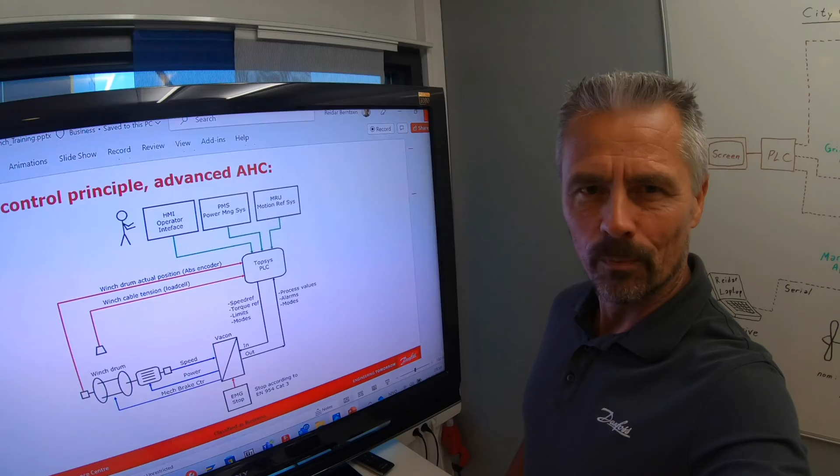You should have seen episode 4 with the basic setup and open loop settings. This episode 5, we are going to look into the closed loop IF control, sensorless, and overspeeding.

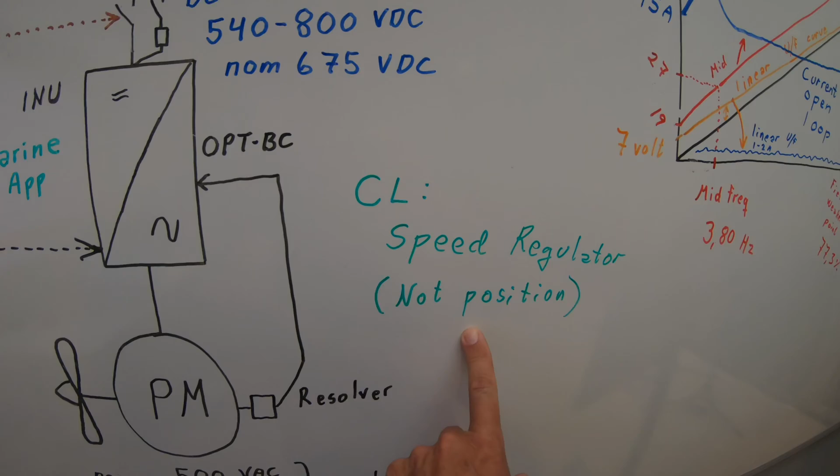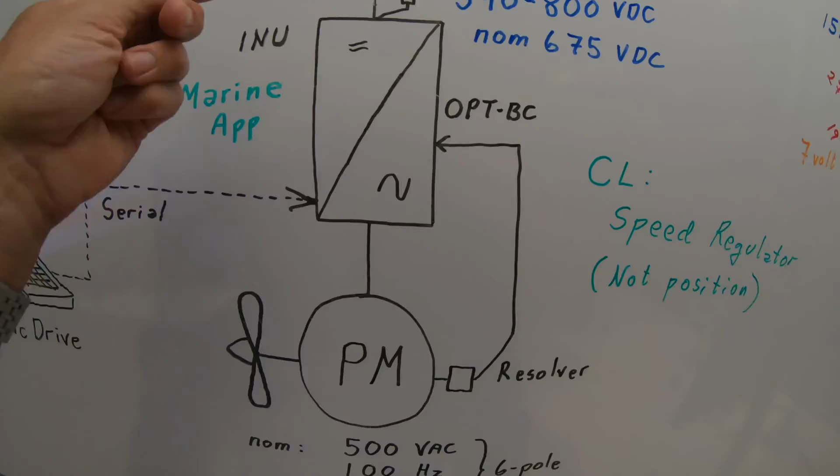The closed loop on a marine application is basically a speed regulator, not a positioning regulator. We have feedback from a resolver or incremental encoder to the option board in the drive, and it will try to do the most precise speed that is ordered. For positioning systems, like advanced winches, active heave compensation and so on, usually the closed loop in the drive is this one, and then you have a PLC control system that calculates positioning and motion control.

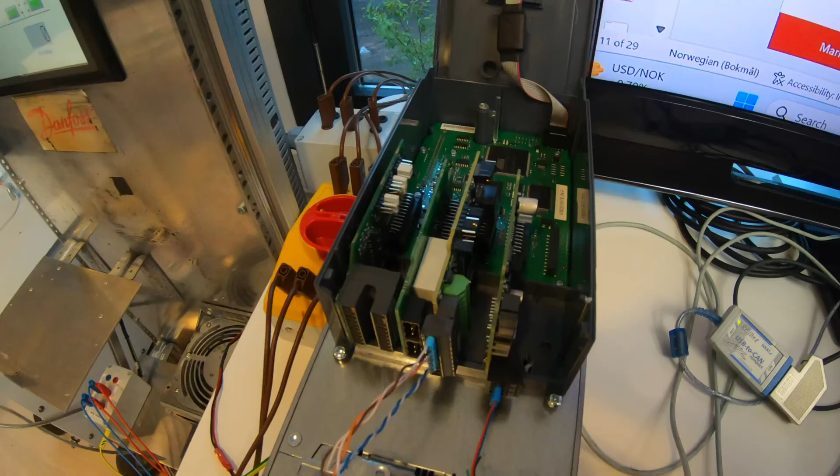The encoder board in the drive must be put in slot C. In this case, we have a resolver in the Editron motor and the board is opt BC. Here we see that the jumpers need to be set to a specific setting. If we look at the jumpers.

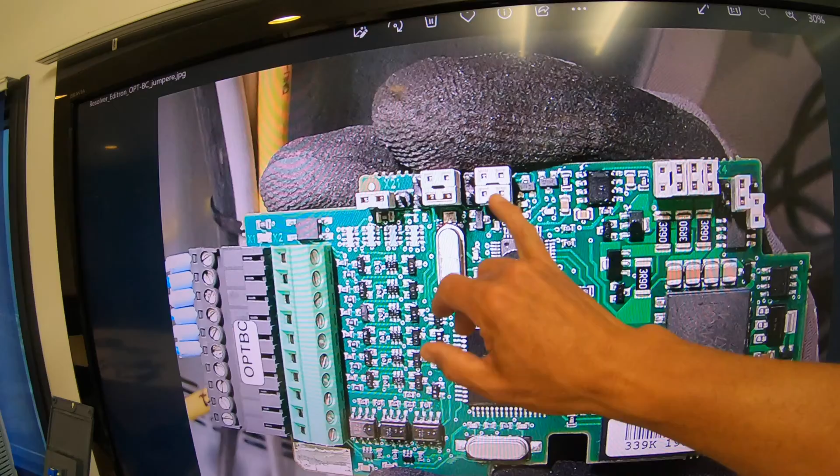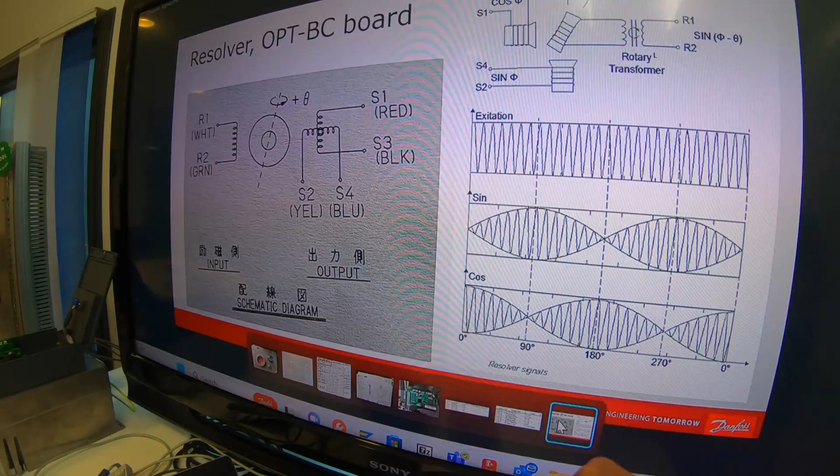This is the amplification of the sinus cosinus. This is the excitation voltage, 7 volt, because the signal on the resolver looks like this. You have an excitation of 10 kilohertz, 7 volt amplitude, a sinus and a cosinus signal. It's actually a positioning signal, not really a speed signal, because the drive calculates the speed out of the positioning.

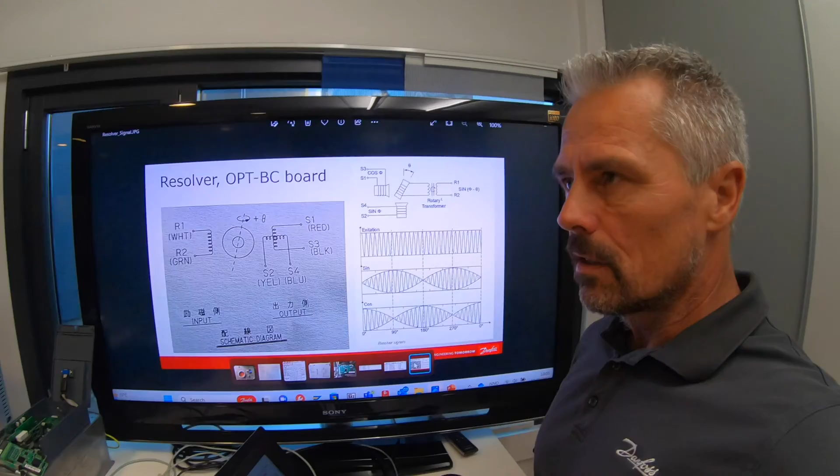The reason why it's positioning is that the drive needs to know the polar angle where the magnets are. So traditionally the resolvers are for positioning and identification of the polar angle.

With the Editron motors, the resolver will have the same pole number as the motor itself. So this is a 6-pole motor, and the resolver is actually the same, so it's mounted synchronous to the magnets. You can actually use the same shaft angle parameters for all of them, so identification of the encoder, you can copy it from another drive.

The cable itself needs to be really well shielded. Grounding of the motor needs to be quite well. This is really cheap-ish cable, for the laboratory only - you only get away with it because it's short lengths. It's really super important that you have a good grounding system of motor, drive, and control system.

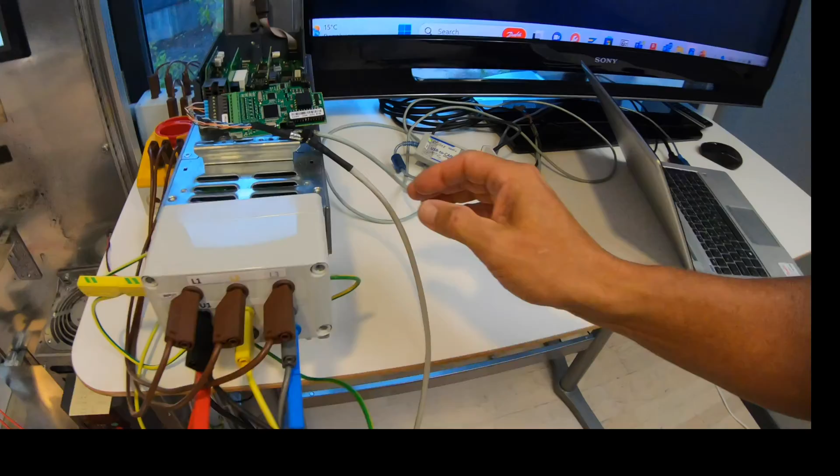You will get a lot of noise and problems with signal quality if the grounding is not correct. Usually we ground the signal cable here in the drive end and not in this end. This end is grounded by the big grounding connection back to the drive.

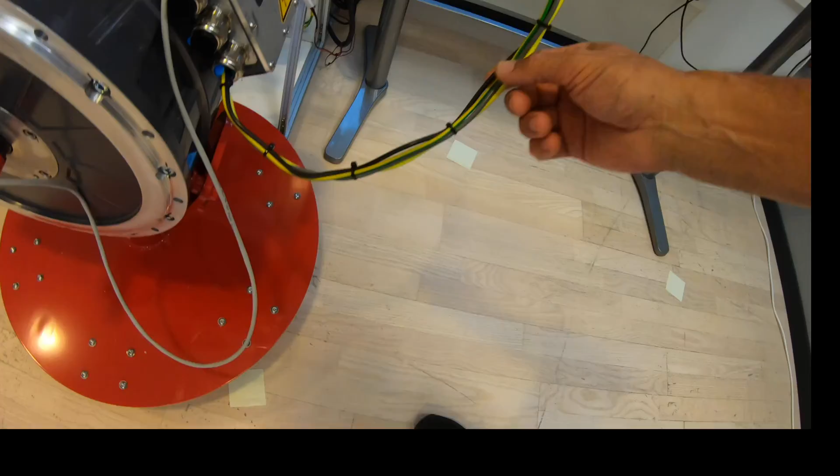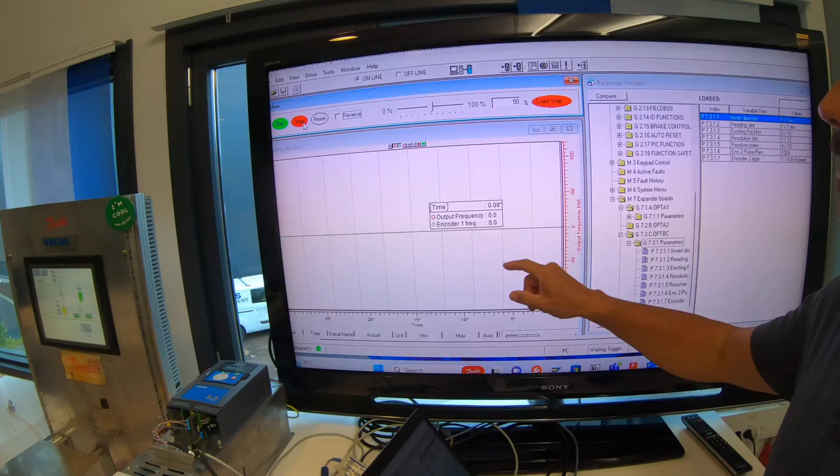Functionality test, scaling, and also a look at the noise from the resolver signal. On NcDrive, I show my output frequency from the drive. I look at the encoder 1 frequency, which is the raw signal coming from the resolver. On the parameters, I show expander boards, opt BC board, and the parameters related to the resolver.

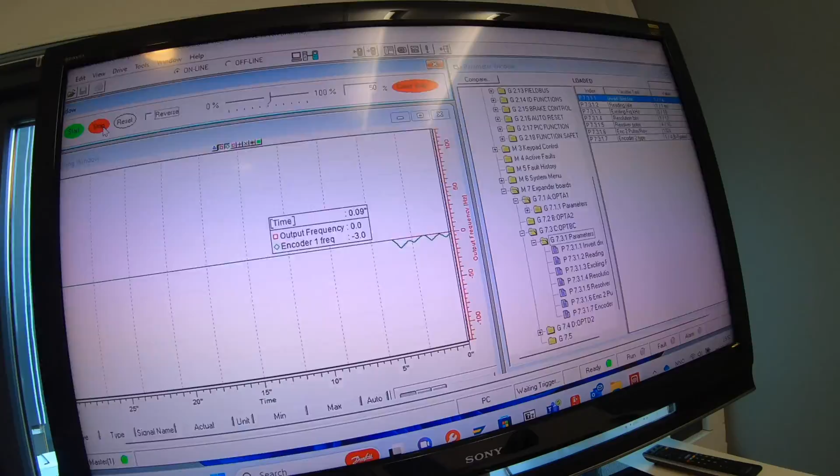If I have a chance to turn on the shaft, I would see if there is a signal coming at all. Yeah, the green one here shows there is some signal. Then we look at the scaling.

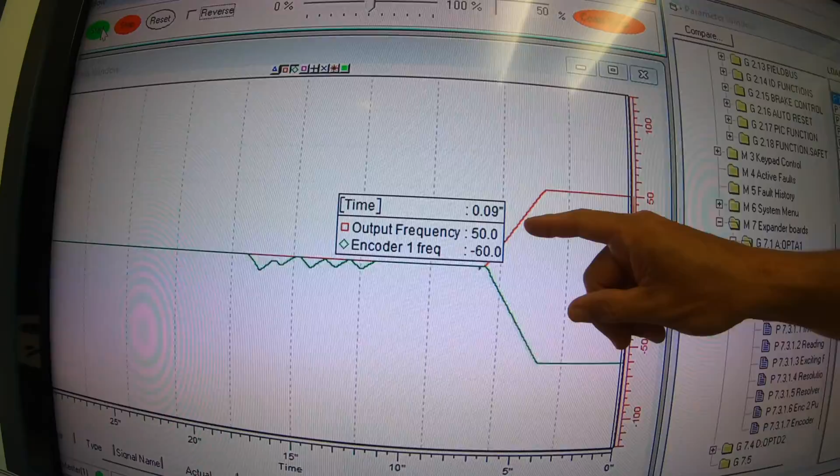If we start the motor now at a specific speed, 50 Hertz. At 50 Hertz from the drive, I read encoder frequency minus 60. Something is wrong. Here the thing that I need to adjust is the direction of the resolver signal.

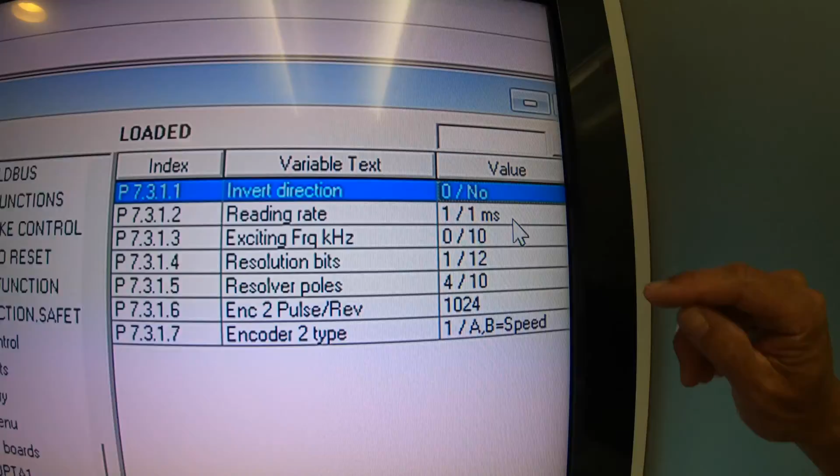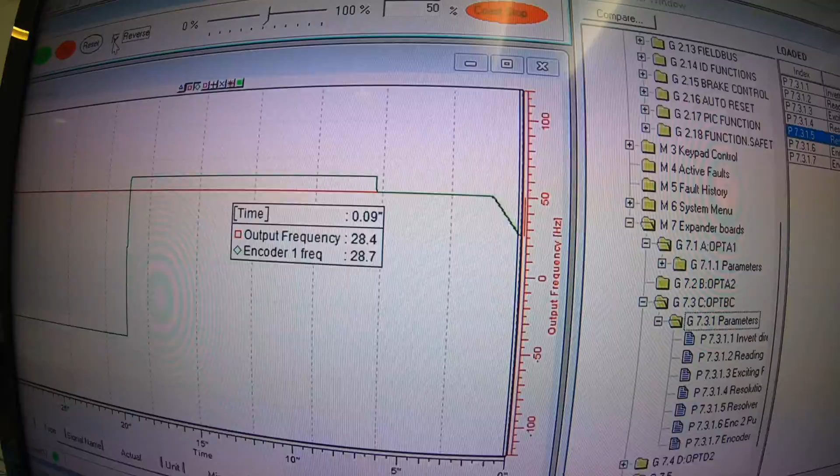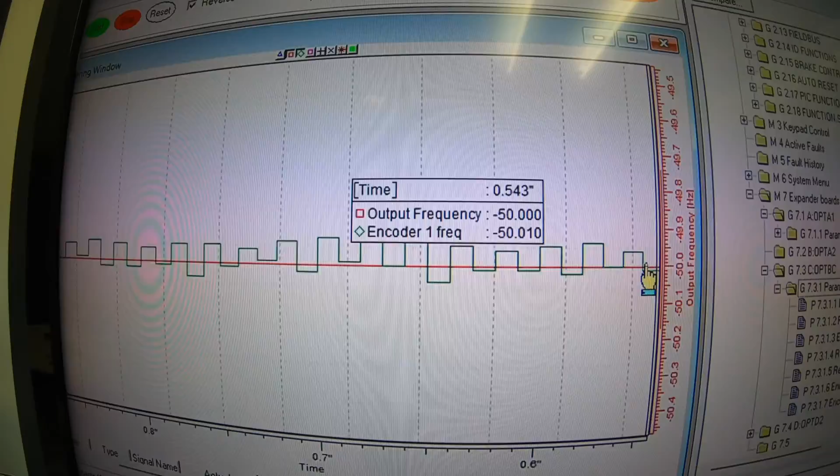What about noise? Take a look at quality of the signal. I can see here that my green signal is not identical to the output frequency, so there is a small noise here, and that is probably related to my grounding and shielding of the system. We can tolerate some, but not too much.

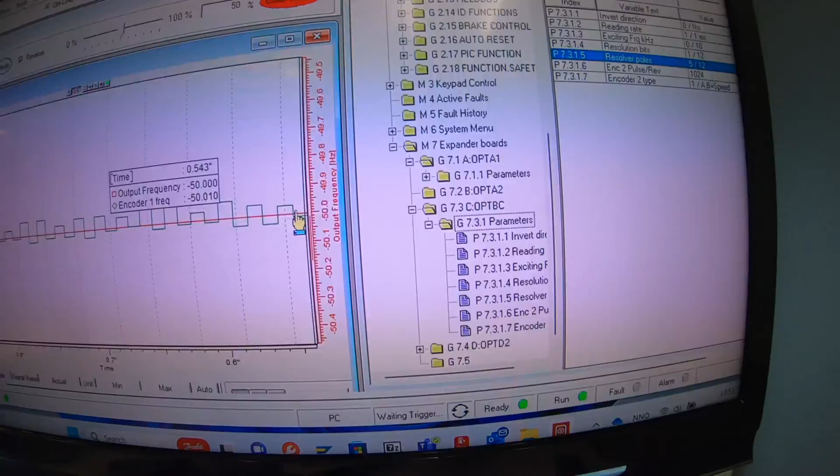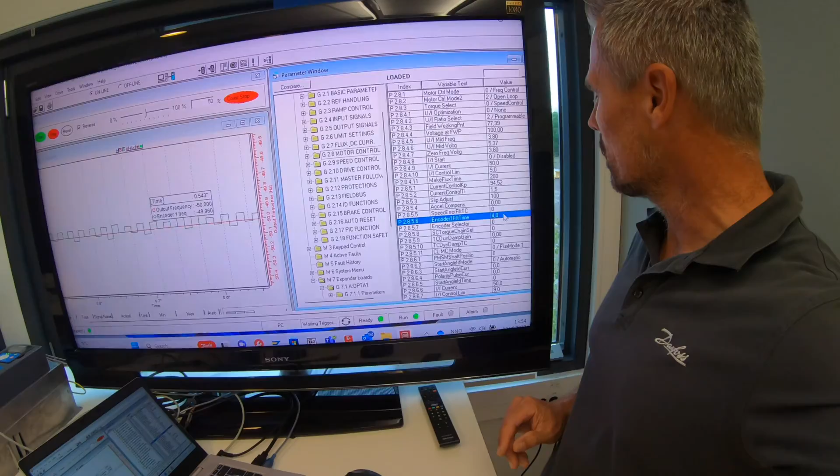Is there some filtering? Yes. Go to the motor control, and here is encoder filtering time. I think 4 milliseconds is a good starting point for most industrial applications with long cables and big motors. Also, the speed error filtering can be set to something - that is the result coming out of the speed controller, so it can also be dampened a little bit. So these two, you can dampen some cable problems, but it's limited how much you can do it.

Before going to the closed loop with a resolver, the drive needs to know the relation between the magnet position and the resolver position. We do that with an encoder ID run. On the PMSM shaft position, we will see a number coming up when we do this identification run.

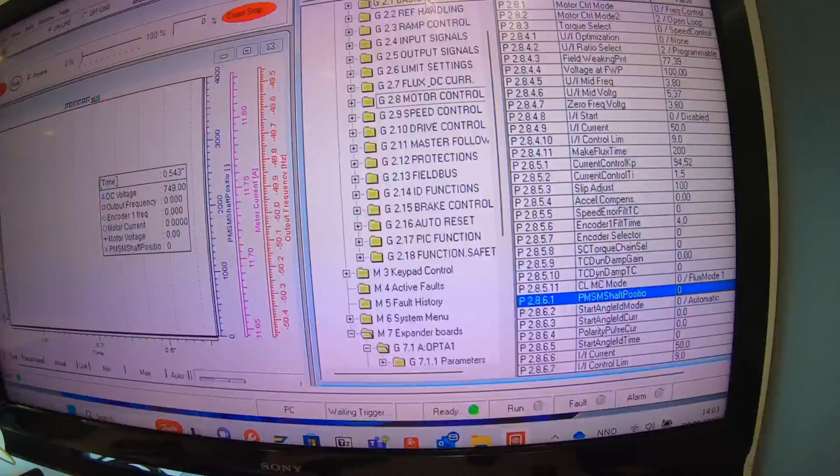We can see what's happening here on NCDrive. We go to basic parameters, select identification of the encoder, like this, and we hit the start button.

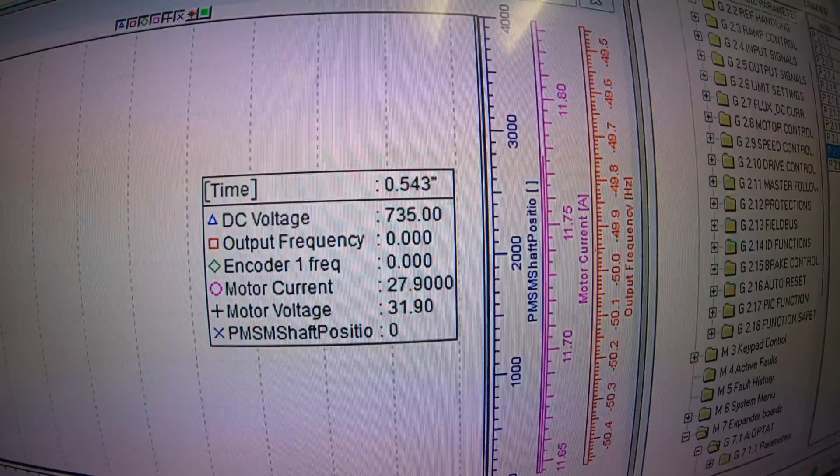Something happening, there was some current, something going on. We were in the run status, and let's see. Suddenly it updated the shaft position and there was no faults.

So now we had a successful identification of the resolver, and it measured the relation between the magnets and the resolver. Now with the encoder identified, we can go to the motor control, and instead of frequency control, we select number 3, the closed loop speed control.

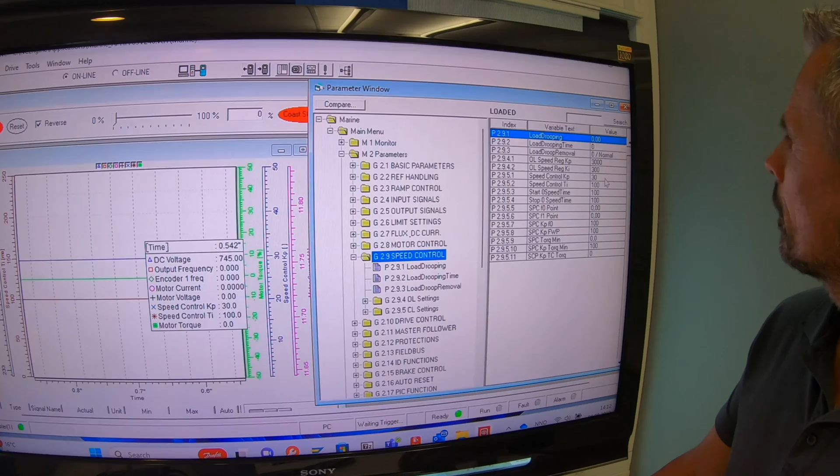In the speed control, there is amplification and integral time of the speed controller. Now it's set for induction motor, 30 and 100. I know by experience that it should be 6 on the KP and 200 on the TI for most all normal permanent magnet motors. But we can just for fun start and see what's happening when we start the motor now.

When we start the motor, we see that the current is really small, 0.6 something, but the torque is a little bit fluctuating, and that is the speed regulator. It's a little bit provoked by this setting. It will run, but listen.

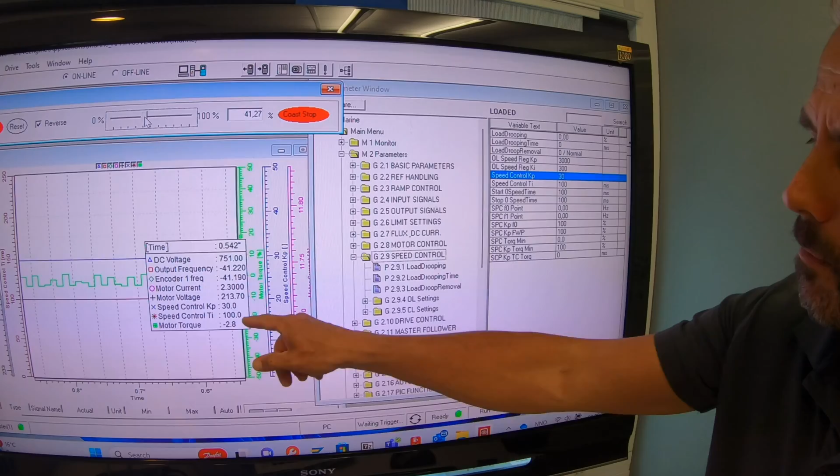This is oscillation caused by my settings here, and the torque is a little bit off. Sometimes you can see and hear the motor like we do, easy. But sometimes you sit in another place than the motor is - you are in the drives room and the motor is down in the thruster room. Then this motor torque flying all over the place is a signal that something needs to be tuned.

I go with this KP from 30 to 6 and listen. Smooth. Speed control TI should be 200, then you are pretty soft and nice.

That means 200 milliseconds to increase the torque 1%. So that is the rate that the integral part of the regulator will do. It's a pure amplification and integral part - there is no derivation part in this regulator.

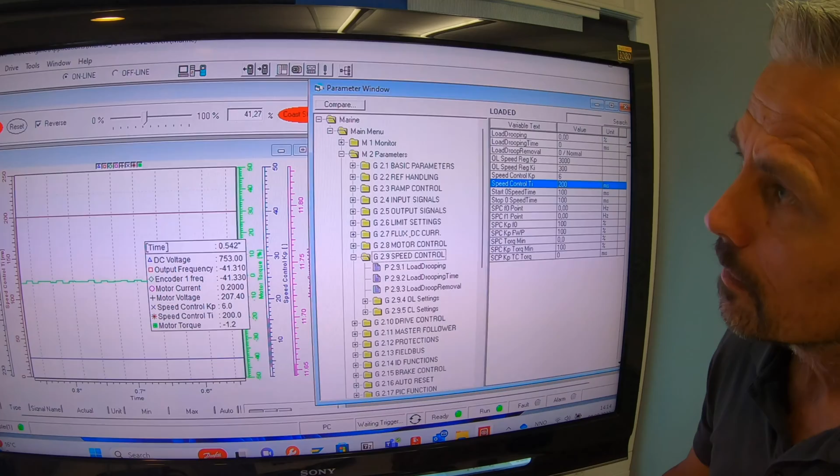So basically we now have a nice running closed loop control. So that was it. Look at these dynamics - it can act almost like a servo, shifting direction in 0.2 seconds we have now. Can easily go very high speed.

We now have a smooth running closed loop control, and we can see this here by shifting direction from plus to minus very fast. You can only do this when the mechanical process allows it, and you have a stable DC voltage and an active front end.

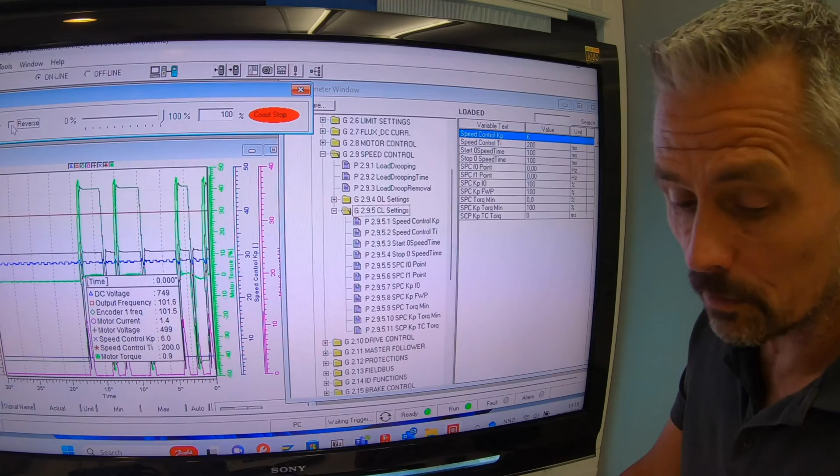Look at my DC voltage, it's relatively stable. What happens if I stopped my active front end? There is no regenerative place to go. I stopped my active front end, and if I try to brake now, what will happen then?

The DC voltage went up into the over voltage controller area. My torque was all over the place, so I didn't like that - DC voltage went down to 580 and there was no place to go for regenerative energy.

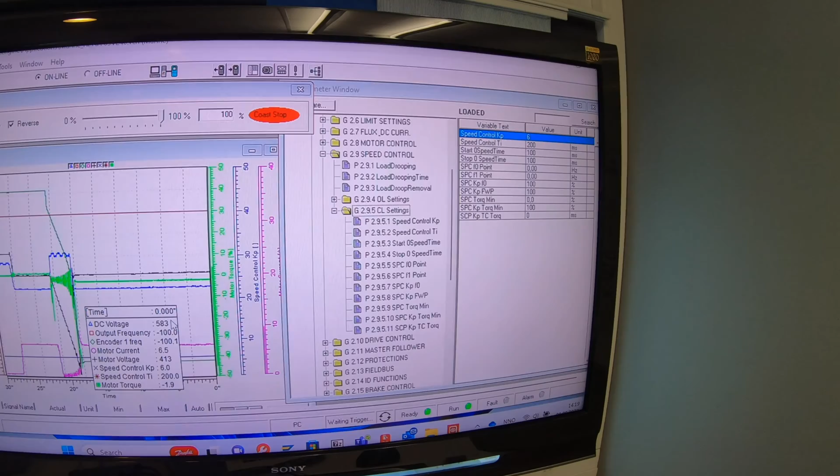So let's start the active front end and we have a happy drive again. And then we can run like a Tesla car, a Formula 1 car. It's actually a very similar motor standing here, which is in the Tesla 3, I think. So this is the response in these motors - it's really impressive. But it's only in closed loop you will find this performance.

The closed loop motor control with encoder or resolver is brilliant for winch control, for the torque calculation and torque limits. We will now have a demonstration of how accurate the torque limiting actually is here with a blocked shaft.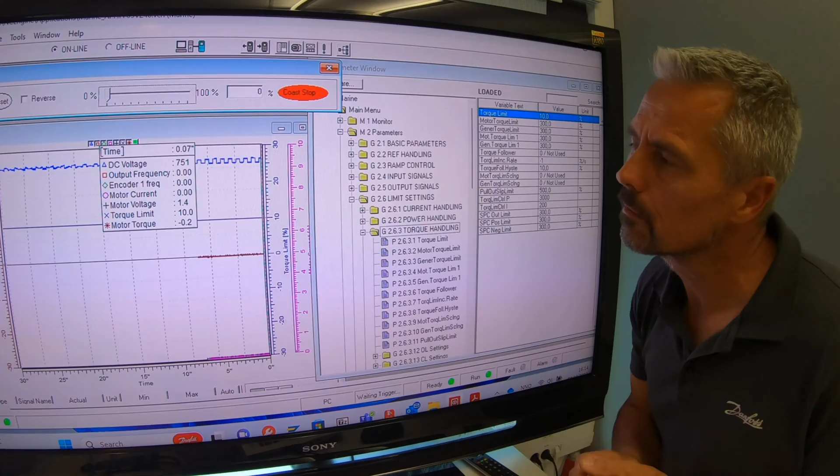So I have put a torque limit of 10% of the motor nominal. Here you can see the torque limit, and this will be the actual torque, the current. When I start with a speed reference of 0, it means sit put, don't move the shaft, and it only needs nothing current to do this.

The speed controller basically only sets out the current needed to do the speed that you are ordered. Okay, let's order 1%, and remember the shaft is blocked.

It goes to 10% because that's what's ordered, using 3.1 amperes to do this job. Let's say I want this winch to pull a little bit harder in the cable, 15%.

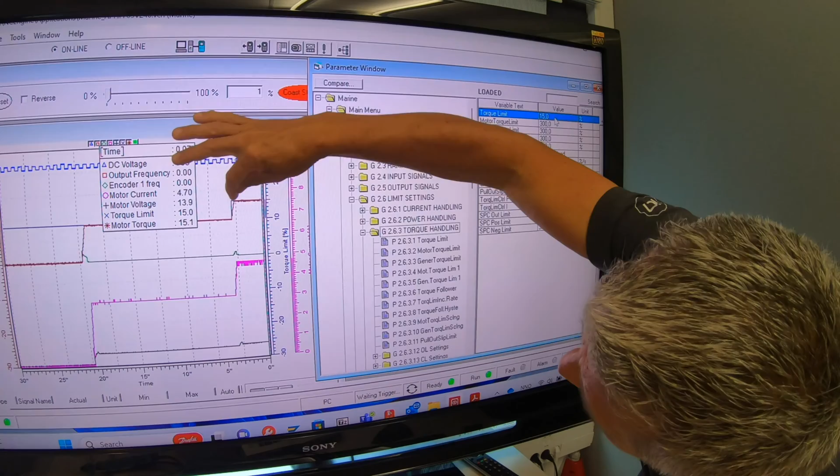Here you can see the limit and the actual torque is within 1/10 of a decimal, that precise it is. The current now went up to 4.7. With my blocked shaft I cannot go higher than 15%, but here you see the resolution.

What if you go in the other direction, 1%? It can still figure out what is 1.1, 0.9 of the motor torque when we limit it to 1%. So the resolution and precision in these motors and this resolver feedback is pretty good, and for winches this is really brilliant to keep a constant tension in cables.

To get a touch and feel with the torque, here is a free shaft. We now started with a speed reference of 1 and a torque limit of 1%. We can now still move the shaft. This is 1% torque limit.

When I increase the torque limit to some 10%, there is no possibility that I can move the shaft. 15%. Back to 1%.

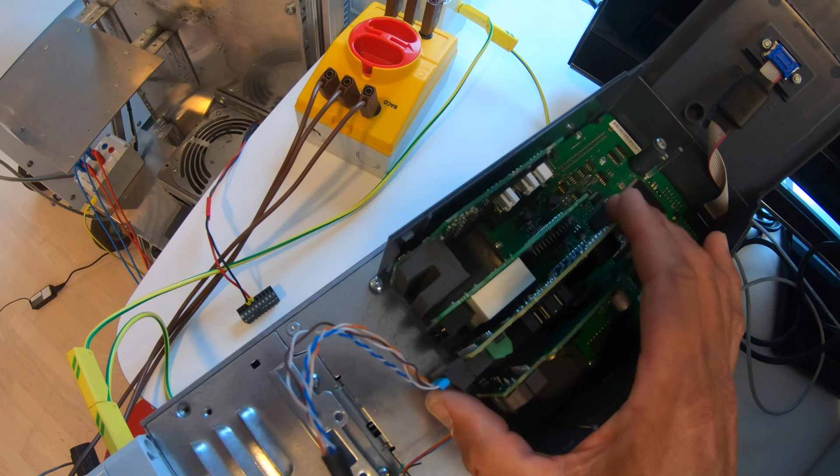And now the torque is a constant tension on the cable, which is just a few kilos. Now for the sensorless closed loop, let's remove the resolver board completely, so it's almost like a rim thruster or any application. There is no sensor or resolver or encoder out there.

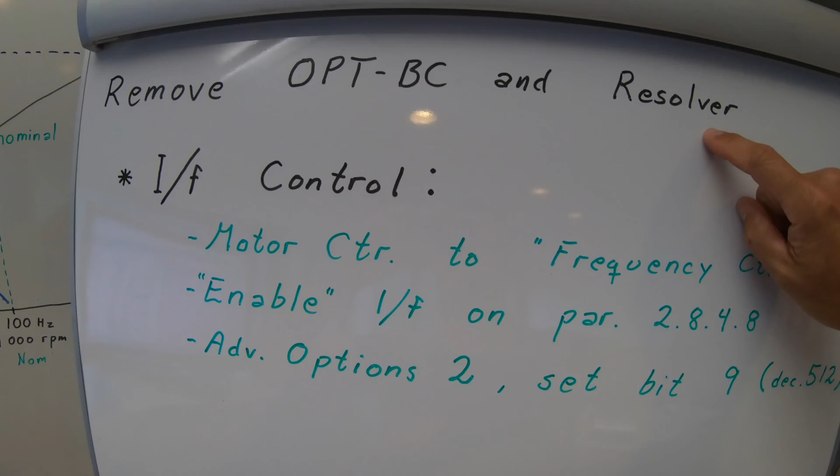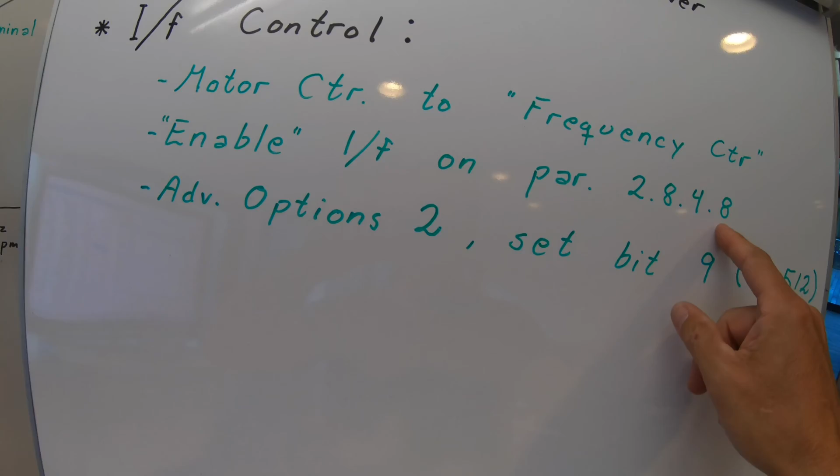We have now removed the OPT-BC board and the signal from the resolver. We are going to set up the I/f control. The parameters needed: motor control has to be set to frequency control because there is no resolver there right now. Enable I/f control on this parameter and advanced options 2. Bit number 9 has to be set high, that is decimal value 512.

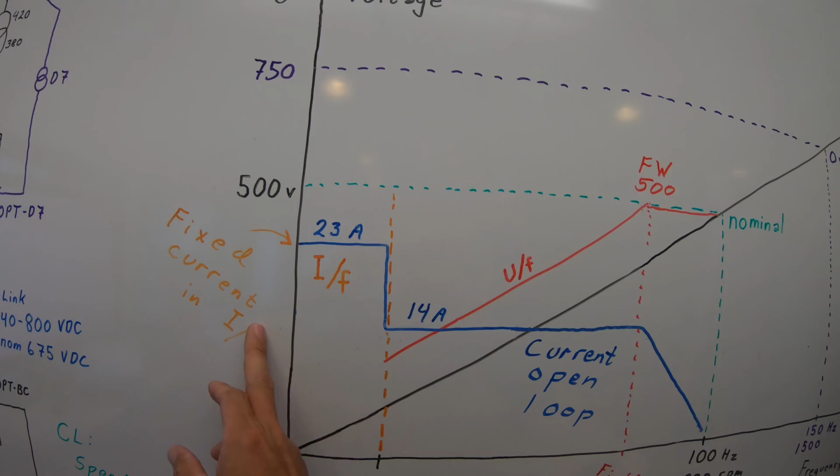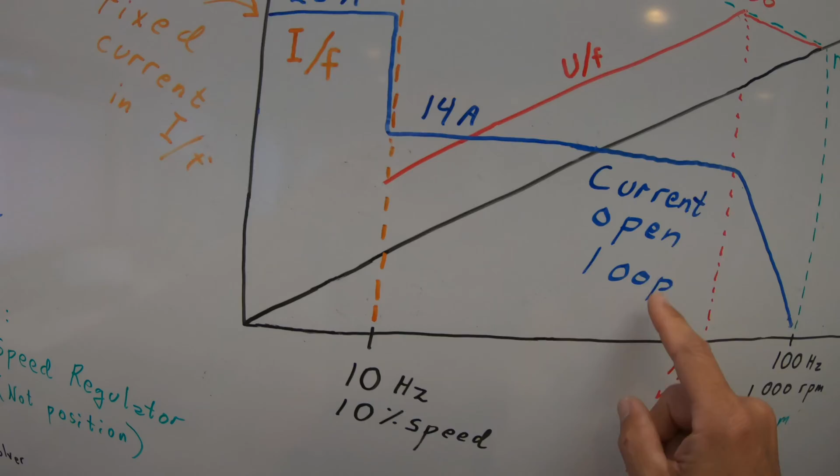What is I/f control? We select a frequency, and below that frequency there is a current controller setting out the current that we decide. I have set 75% of motor nominal, which is 23 amperes, just so it's easy to recognize. Then when we hit 10 Hertz, it goes to the U/f curve open loop, which is about 14 amperes, just to see this nice transition.

Motor control mode to frequency control. The I/f start is enabled. The current at I/f is 75%, which is 23 amperes in this case. I/f control limit is 10%, which is 10 Hertz in this case.

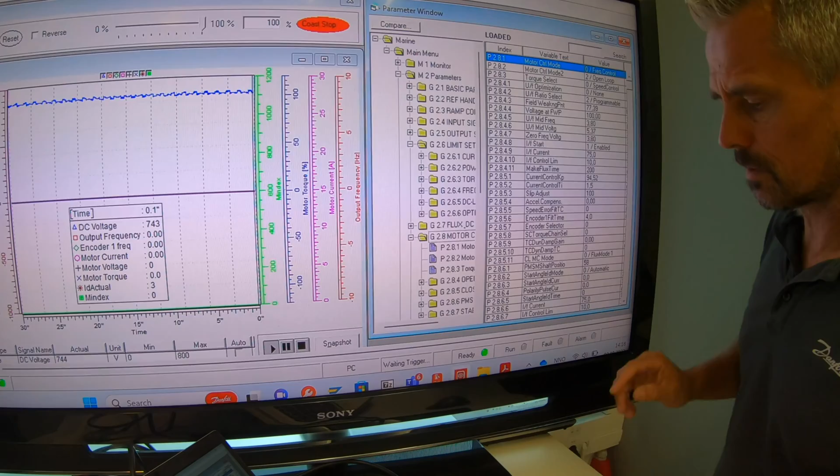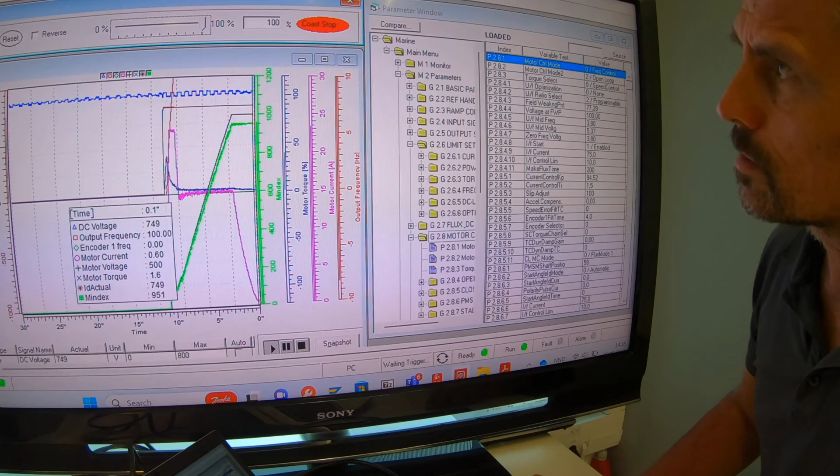Let's do a ramp of 10 seconds, and then we see the ramping up, what's going on. And here we saw there was a transition from 23 amperes to 15 amperes. Let's just stop it there and see how it looks on the graph.

Here we see what's going on, IF startup with a U/f curve. Here we have the current going up to the ordered 23 amperes, and when we are passing 10 Hertz, it goes down to 14.6, which is the U/f curve current.

Here we see the green one, modulation index and also the motor voltage going up to the field weakening point. Here the voltage actually works a little bit to have the current controller exactly on 23 amperes. Here we see the motor torque go up in the startup.

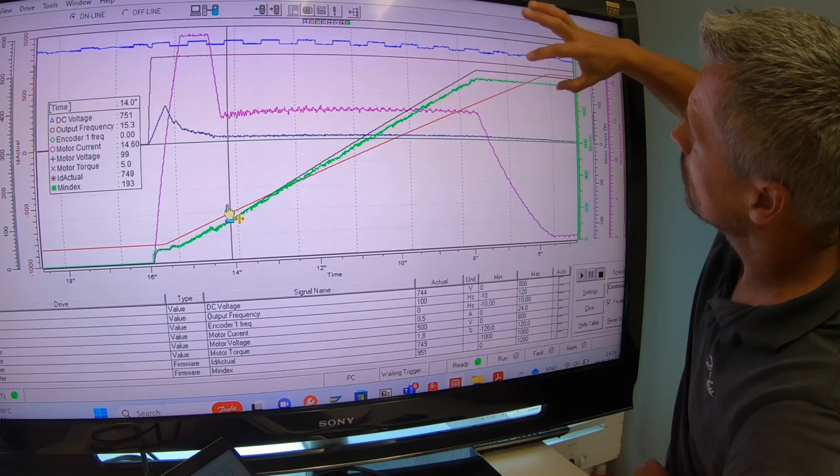So this is a nice thing to just pull the magnets and get a firm startup. And here we see hitting the 100 Hertz away into the field weakening point, and the current goes down according to the U/f curve. So this is our IF startup with U/f curve on 10 Hertz.

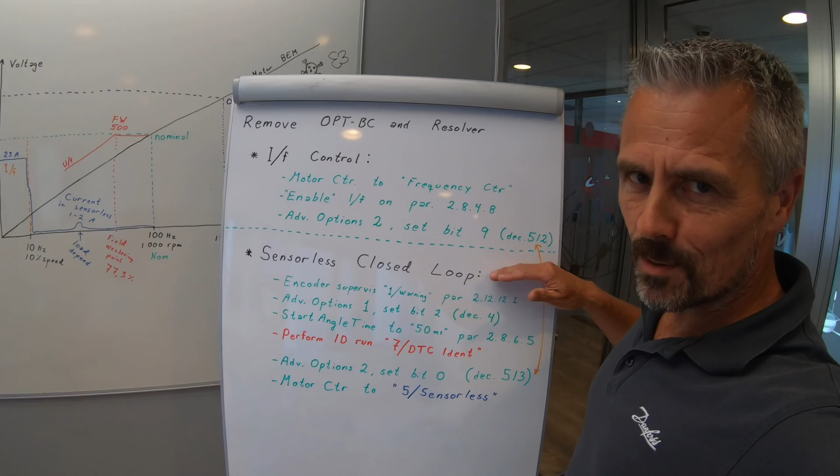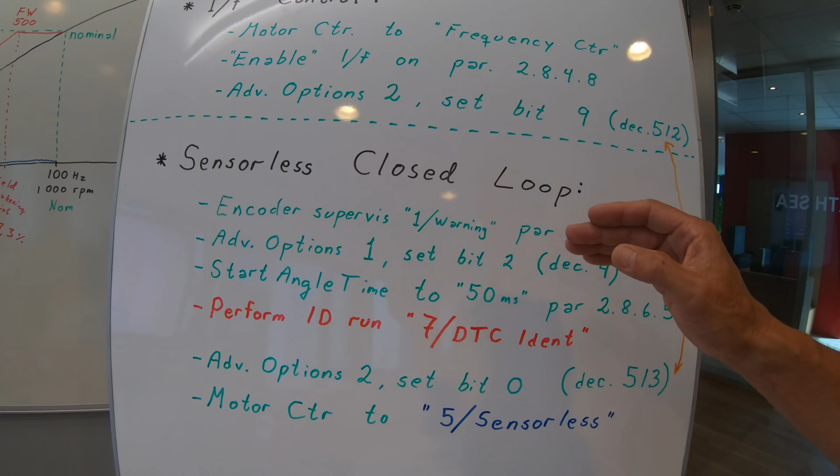Now we have come to the juicy part, sensorless closed loop setup. Parameters: put the encoder supervision to warning, and also advanced option 1, set bit number 2. Then we leave the warnings from the hardware encoders out of the speed controller. Also set the start angle time to 50 milliseconds because the default value of 0 might cause some startup problems.

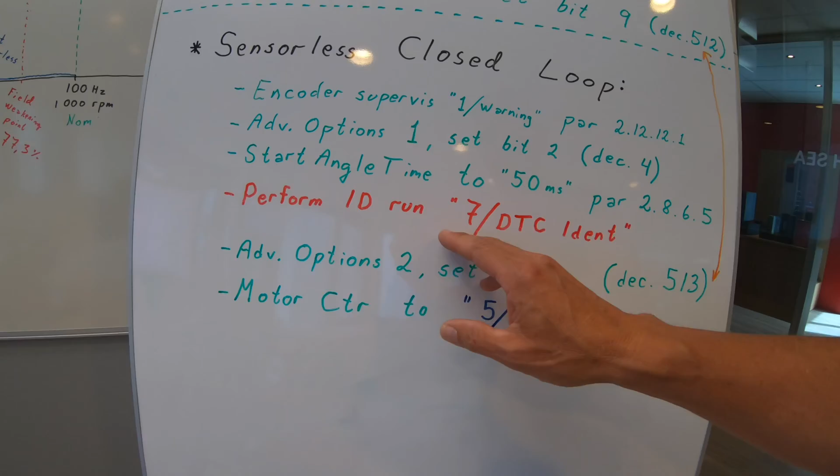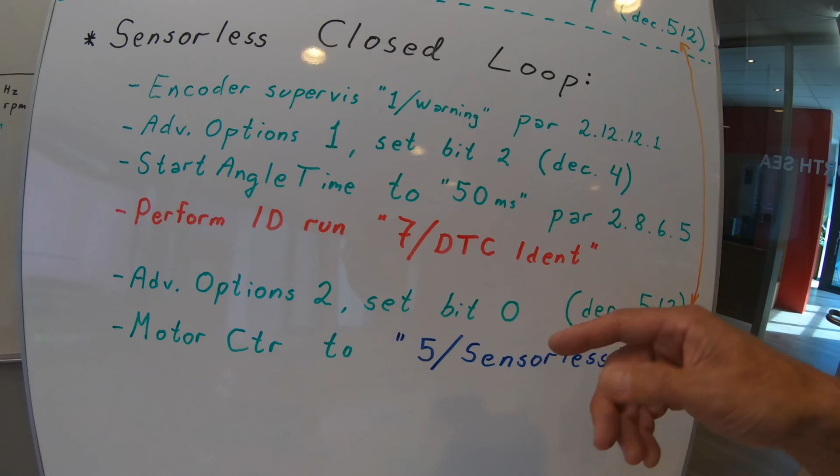Then perform the identification run for dead time compensation, which means the drive will measure the real time delay and response time in your hardware. We are using the same software for a big drive as for a small drive, and this will determine the differences. Then put advanced options 2, bit number 0.

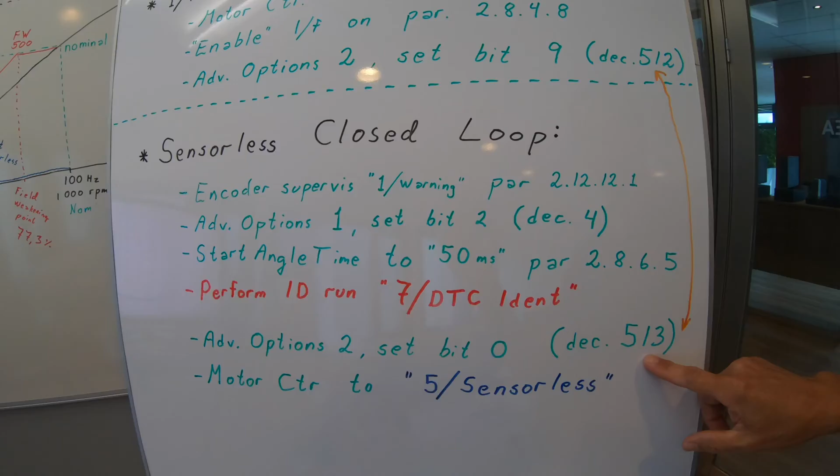We already have set bit number 9, so the value sits at 512. It should now go to decimal 513. This allows you to select motor control to 5, sensorless. And here we go, that's all the parameters.

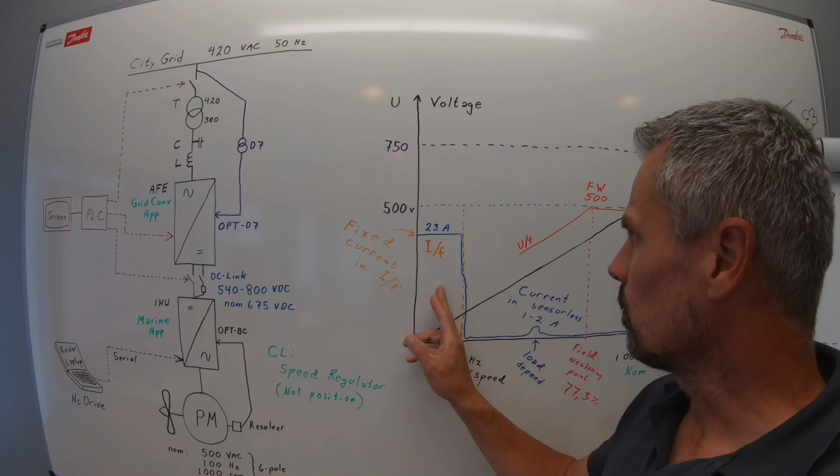What to expect: we will start up in IF control. We have already set the current to 23 amperes, a little bit big but easy to see. At 10 Hertz it will kick in its sensorless closed loop. The current will go very low, 1 ampere, 2 ampere or something. Only when there is a load on the shaft will there be a current of any significance.

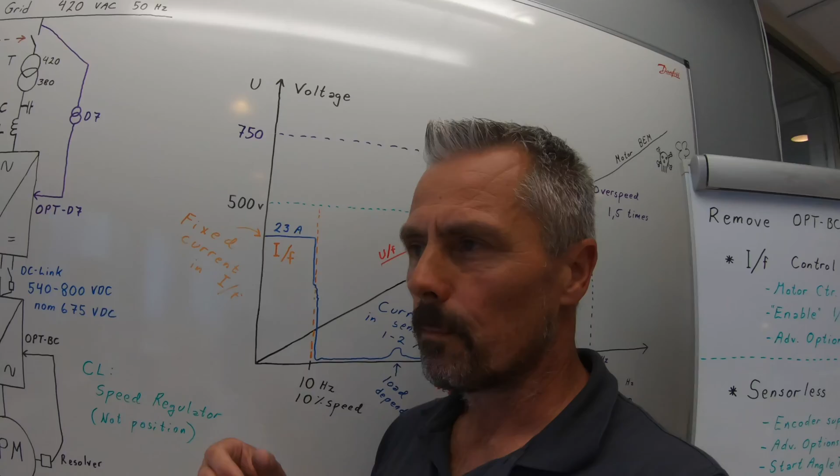I expect the performance and behavior of the drive to be very, very similar to when we had the hardware encoder in the closed loop. So the only difference you will see is where you put the IF control.

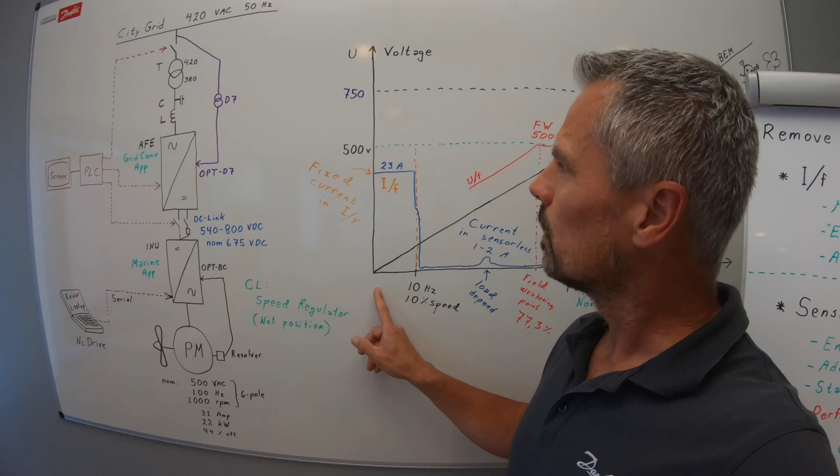How low can you put it? 5 Hertz, 7 Hertz? Depends on your load, how hard it is to start your ship propeller. A rim thruster, which can have a lot of friction, might need a high current, and a process which turns very easily can have a lower current.

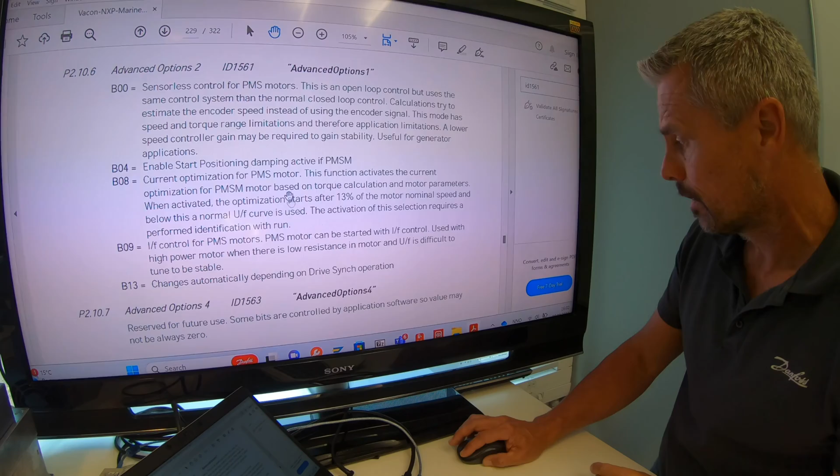Description of these bits I set in the advanced option. You find the application manual for the marine application. Here, advanced option 1, where you disable encoder fault on bit 2. On advanced option 2 you find the sensorless control for PMS motors on bit 0, and IF control on bit 9. In the application here, I start up with 4 and 512.

I haven't turned on the sensorless before I have done the DTC. I do the DTC first. In protections, I have turned off the encoder fault, I put it to warning down here. Encoder supervision to warning. In motor control I have set the start angle time to 50 milliseconds.

Okay, now we are basically ready to go for the identification run, and here we should select the DTC ident. Let's hit the DTC ident and then the start button and see what's happening.

You went to run, something is happening here. It's a current of 10 ampere, something quite different than the IF current that is 23 ampere, 21, 22 ampere. So it's obviously measuring some stuff here now.

Start doing some stuff, there is a big reactive current going on. Important that the DC voltage is high when you do this identification run. Takes some time, here it's doing some stuff. Even was a sound.

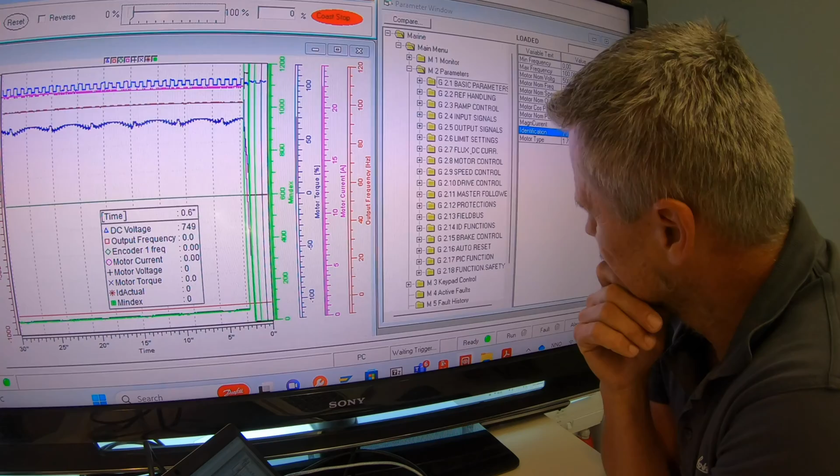Finished. Good. And when I see there is no fault here, it goes out of run, we are good. So now we can put it to sensorless motor control and see how it behaves then.

We go to the motor control, we select the 5 sensorless speed control, and now we should be able to start it up. Okay, we started up in IF control. Let's just pull it to full speed and see what's happening.

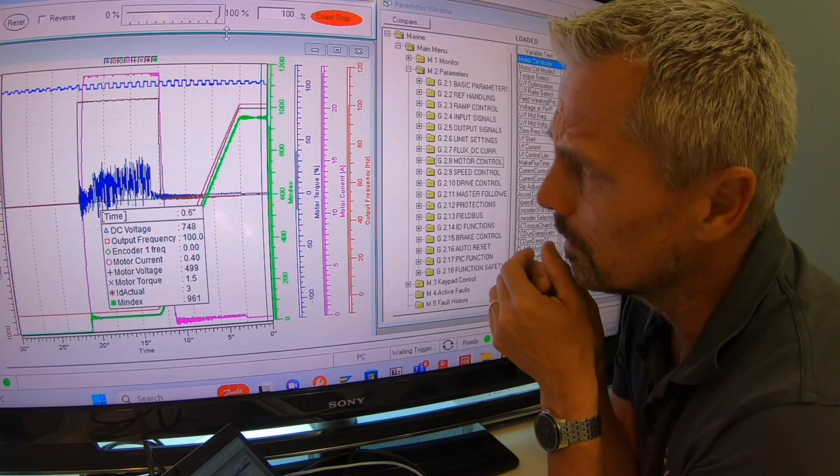There is a 10-second ramp here now. The current is quite high because it's the IF control. And now, look, the motor current went down to almost nothing because after the IF part, it went down to the sensorless closed loop. Looking at this startup, here we see the IF controlled start, and at 10 Hz it goes to the sensorless closed loop.

23 amperes, and then here at about 10 Hz it kicks in the sensorless closed loop. Now the current is very low, it's a very efficient motor, all the way up here, full speed, full voltage. And then we go down in speed, and at 10 Hz the IF control kicks in again, so we are back on IF.

In sensorless closed loop with the IF around 10 Hz, what should you expect of dynamics when you change the direction very abruptly with a ramp time of 0.2 seconds? Actually, it responds really well. You can shift direction in 0.2 seconds.

Is it usable for winches? No. Around 0 speed, the torque control is not precise enough, I would say. But for dynamic purposes, yes, it's a really dynamic motor now.

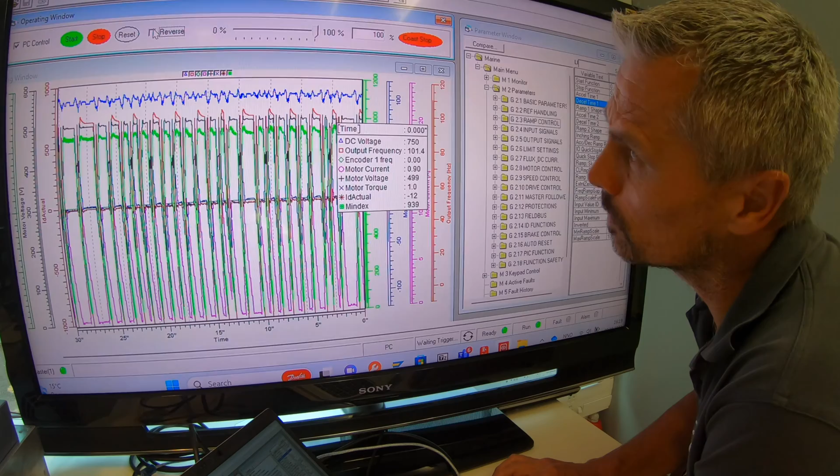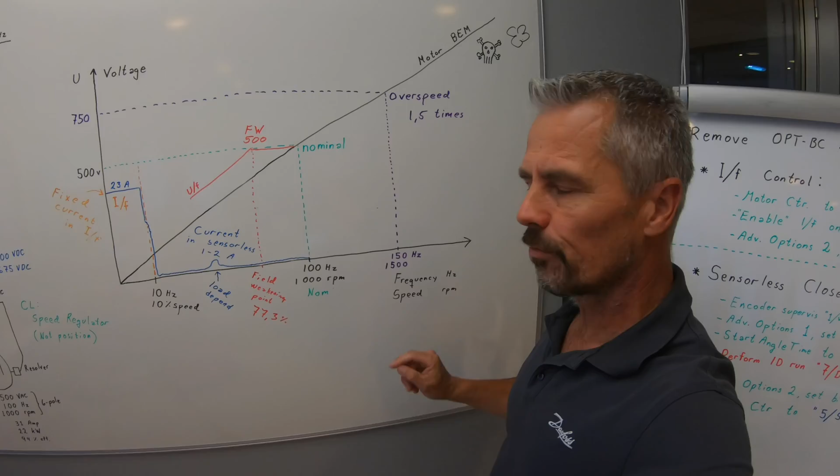Now it gets even more juicy. We go to overspeed 1.5 times. At 100 Hz, this motor is nominal 500 volt. At 150 Hz, the back EMF is 750 volts. This drive cannot give that. I don't have the DC voltage for it, and the drive cannot give 750.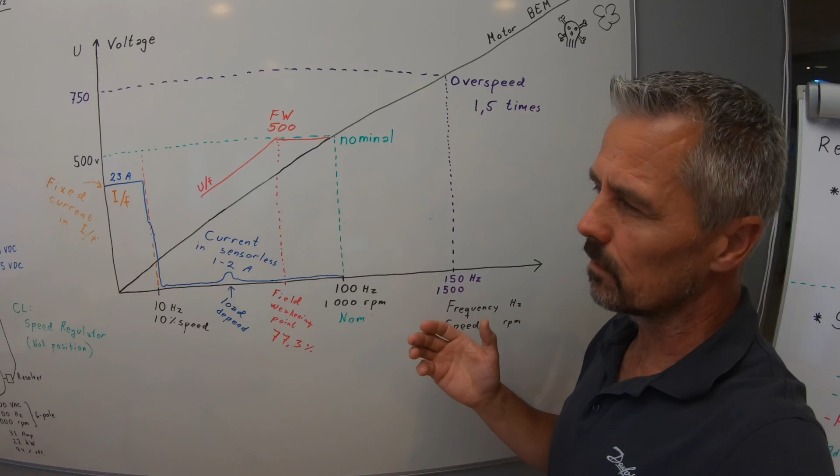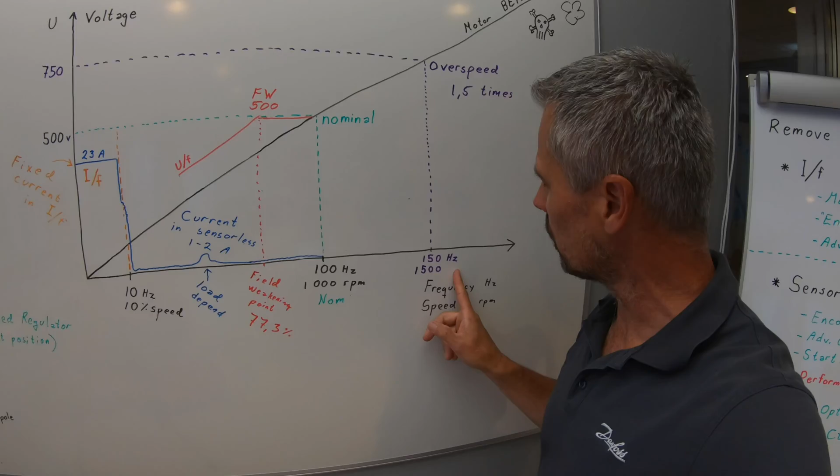So what will happen? The drive will use its reactive current and manipulate the motor to push back the back EMF. We will see a motor voltage of 500 volt constant, and the motor will spin up to 150 Hz using a lot of reactive currents. We will see this on the ID actual current, and the total current also will go up quite a lot to suppress the back EMF.

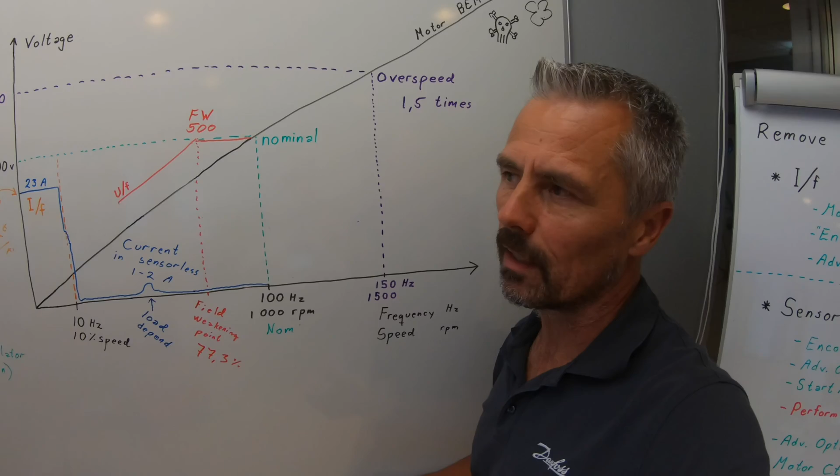This is very similar to what happened in a Tesla 3 car. You can see on YouTube videos how the motor is described there, but this Editron motor is not very different from the Tesla 3 motor in that behavior.

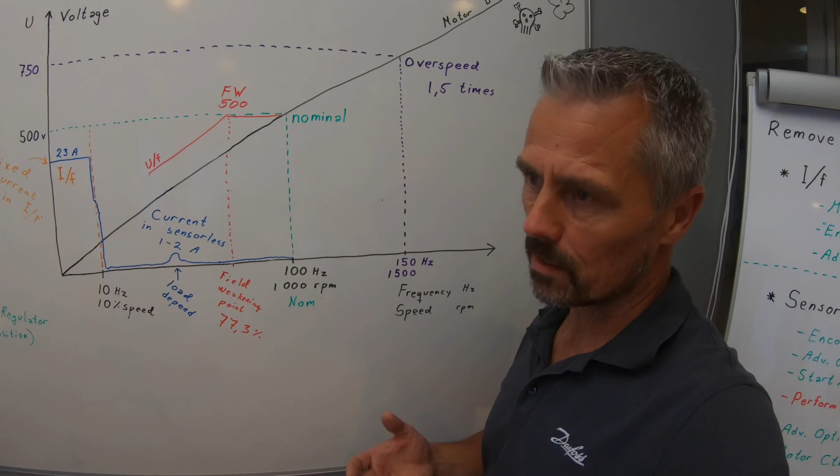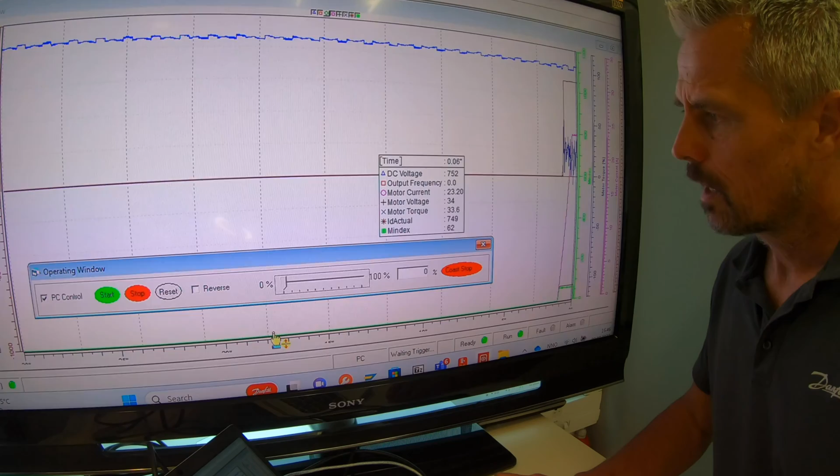Let's see how this looks like in real life. The only parameter I have changed in the drive now is the max frequency, so I will allow it to go to 150 Hz. So when I start it now and pull up here to the full speed, it will in a 5-second ramp go to 150 Hz output frequency.

The motor current now sits at IF current. First it will go down to sensorless closed loop, very low, and then at field weakening point the current will start increasing. Notice what's happening with ID actual at this point. Okay, here we go. No hands.

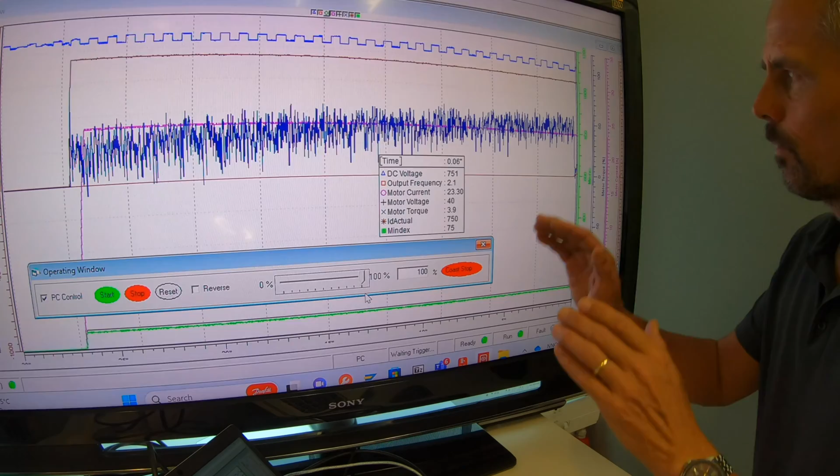And here we are in the sensorless closed loop, 120, 140, 150. Here we sit at 150 and an ID actual of minus 390. Here's the curve, so let's have a look on how this looks like.

What did we just see overspeeding? We saw that the motor went to 150 Hz. That is 50 more than nominal. Nominal is 100 Hz. And the motor voltage sits constant at 500 volts. Still the motor runs. What actually happened here?

If we measure back here, this was the IF startup. Here we see the ID actual, the reactive current going in this direction. And we sit there at IF. Then it starts rotating, spinning. At 10 Hz, it goes to sensorless closed loop. Everything is very smooth and nice. The current is very small.

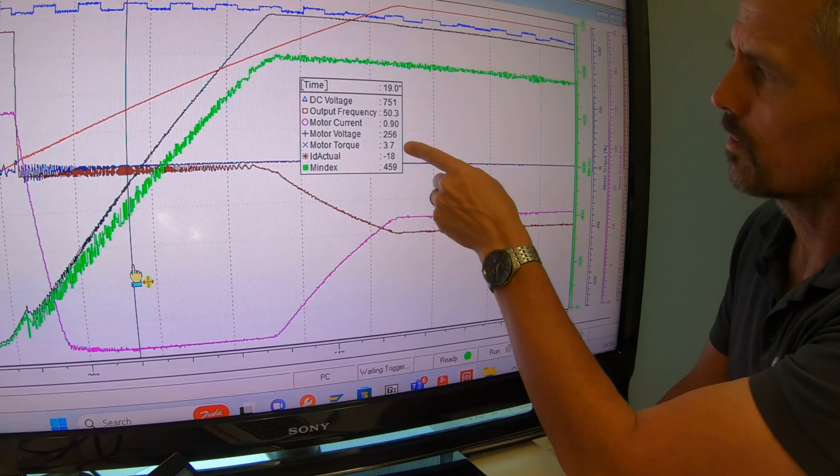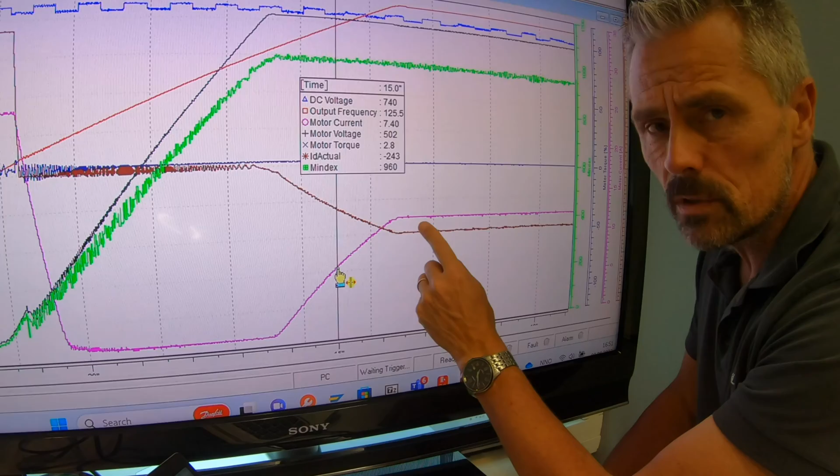And then what happens here? We are hitting 100 Hz. We are into field weakening point. And now we can see that the motor current start increasing. And here, the reactive current go over to the minus side. It's using now the reactive current to suppress the back EMF from the motor. So it sits up here, suppressing the motor back EMF with this minus reactive current.

The total current is 12 ampere, and this is a thing, because if you hit a current limit now, let's say you don't have the current needed to do this reactive suppression, that could be an extremely unstable motor.

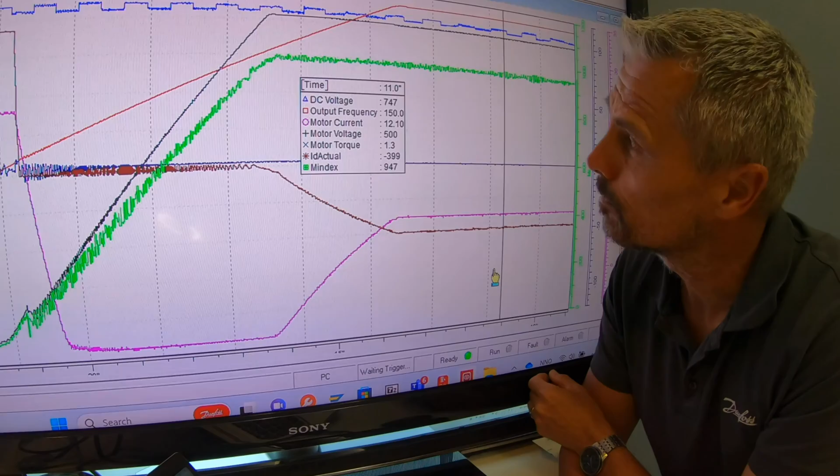What happens if you stop the active front end here? You will get back 750 volt AC on the motor cables that will pass through the IGBT freewheeling diode straight into the DC link, and voila, you got 1000 volt on a DC link, destroying the drive. So having a trip of the drive here in this situation probably will damage your drive quite severely. So this situation, it's physically possible to go up there, but it's with a risk.

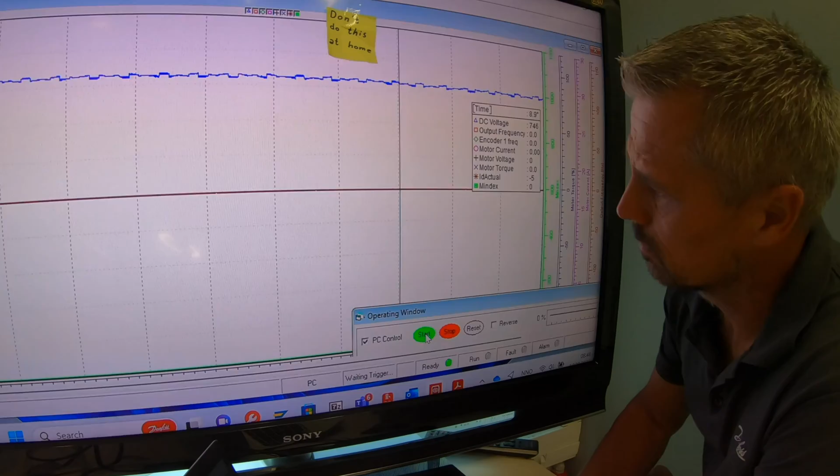Last thing for this episode 5 is to demonstrate what happens when you go overspeed and the active front end stops. This is a don't do this at home. We can do it here on the simulator, but don't do this in a full-scale system. It will maybe destroy the winch and the motor and drives and everything.

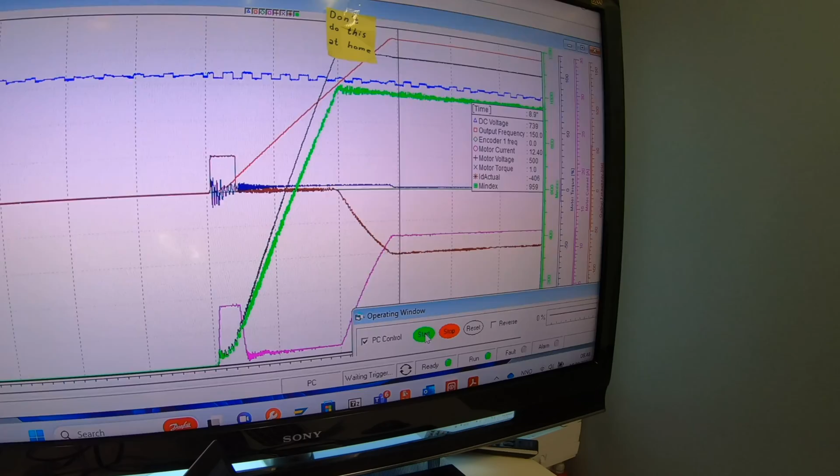So what's happening here? We are starting up, and now we are going to have a shutdown of the active front end that produces a stable DC link. Yeah, you could hear something really bad happened.

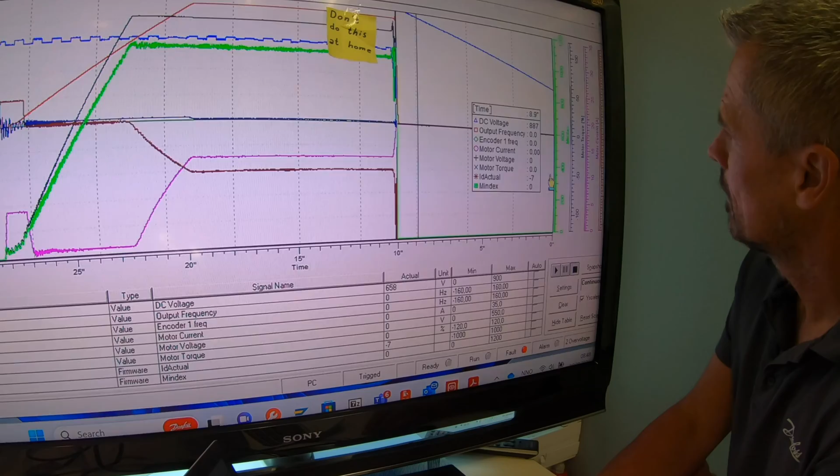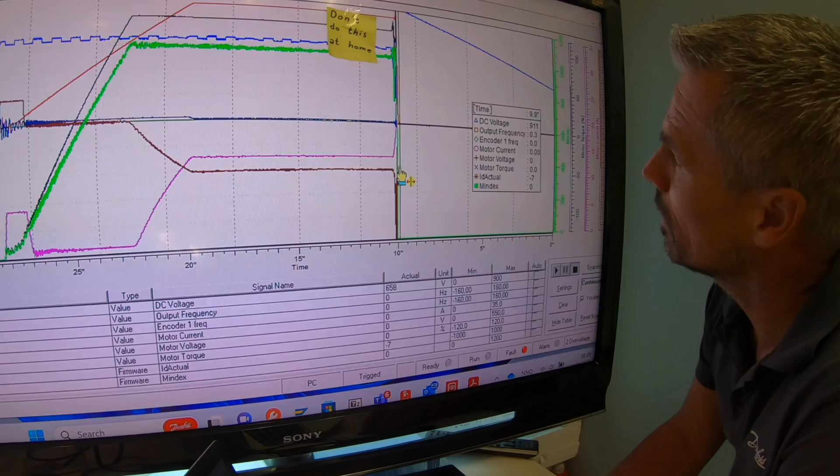Let's see what happened. First of all, the blue line, when the DC voltage dropped, it went sky high after. We went to 900 something voltage, and this drive have a nominal of 675 volts on the DC link, so this is way too much. All torque, voltages, everything went haywire, and imagine what impact this have on the mechanical side, on a winch, on a motor and everything. The drive sits in over voltage, my active front end also is in fault, over voltage, so this is a very brutal thing.

So going into the overspeed area, then you basically are up to the active front end that everything is running, so it's a calculated risk.